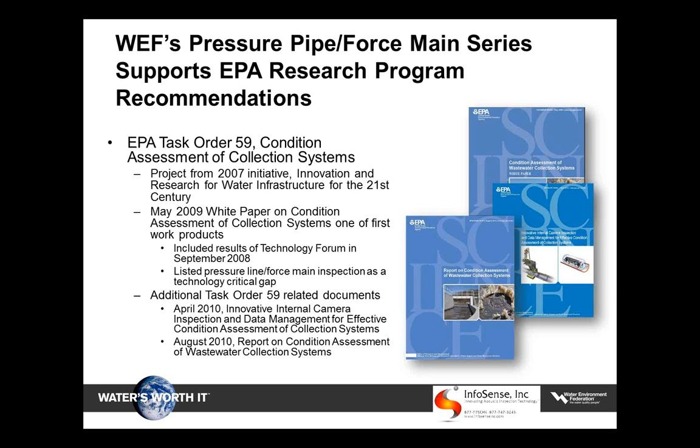Today's speakers: we have Dr. Rob McKim of Louisiana Tech, Mr. Kelly Durr of Brown and Caldwell, and Mr. Mark Lambert of King County Wastewater Treatment Division in Seattle, Washington. The Webcast Committee asked each speaker to emphasize special areas or activities for this presentation series.

It is one of 3 that you've seen advertised through the WEF communications. For today, Dr. McKim was asked to talk more on how you get started, walking through the array of different technologies and screening them for particular local criteria. Mr. Durr was asked to discuss approaches for analyzing the data results and how to handle the data. Mr. Lambert was asked to talk about how to integrate all these processes into site-specific applications and case studies. We also asked each presenter to add a case study to their presentation. So let's go to the first speaker, Dr.

Rob McKim. Dr. McKim is the director of the Trenchless Technology Center and program chair for the Construction Engineering Technology Program, and he's a global technologist for CH2M Hill. Dr. McKim has over 35 years of civil engineering experience in conventional and trenchless technology projects, evenly divided as a researcher and a practitioner. He is a registered professional engineer specializing in the research and practice of trenchless assessment, predictive modeling, asset management, rehabilitation, and installation of pipeline and tunnel infrastructure systems.

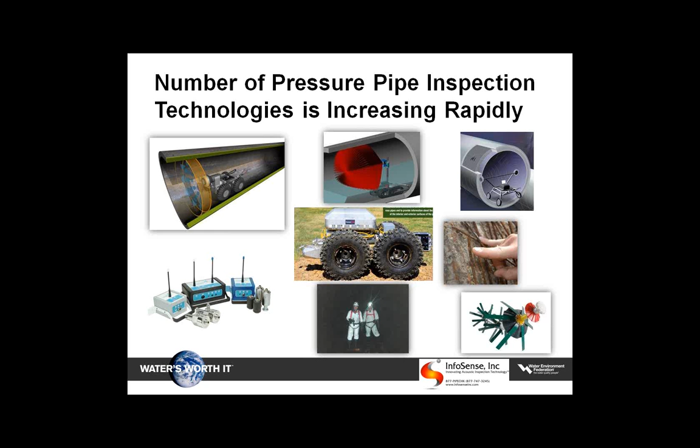And of course, there's what I consider eyeball mark 1, which we can't ignore - it's actually putting boots in the pipe and having a look at it. So we're finding that there's a lot of new technologies coming out that are not necessarily well understood.

So there was an effort around 2010, 2011 from an Industry Advisory Board to start to categorize and work with industry to bring the technologies forward so people understand it. I'm not saying we're the only organization - a lot of very good organizations, including WRF and EPA, have worked on this. We just tried to do it slightly differently.

So we did a joint effort with our Industry Advisory Board people. We found there was an emphasis on pressure side, and both the IAB and ourselves are seeing more need for pressure side. We're always hearing from the wish list we get from our Industrial Advisory Board - what do you want to do? And most of them are saying we want to know more about pressure pipes. So we did an inventory of the technologies we could find, and in 2011 we found 39 technologies under 17 technical categories. We'll talk about the categories later.

So in order to control this vast amount of data, we put together a matrix, which I will show. This is only part of the matrix. To walk you through it, on the left-hand side we have listed the technologies that we found, and along the x-axis we start to define what the technologies can do - are they pressure pipes, what type of materials will it work with, what's the information they're gathering, what is the data they're gathering. This was a way we attempted to organize the data, because it was very difficult to get your head around what all the different technologies could do.

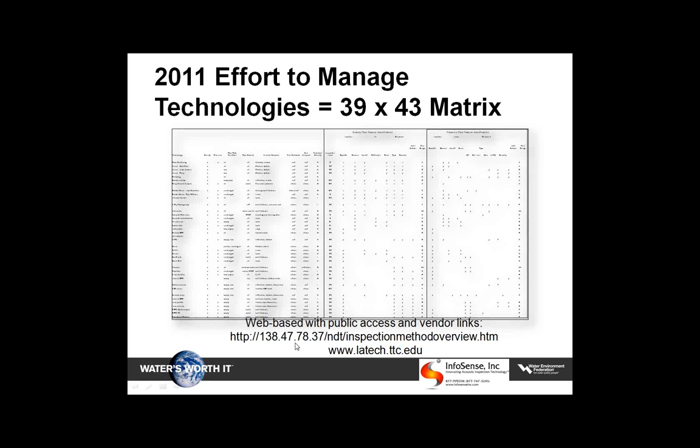This matrix is available on the website, either through our Trenchless Technology website, or you can go right to the HTTP site.

Hey Rob? Yes? That pop-up that keeps coming up, if you just click the first option, that'll stop bothering you. Oh, thank you very much. I was wondering if everybody was seeing that - I thought I had those turned off. That's okay, next time it comes up I will do that.

Some of the matrix input variables that we were looking at that we found were necessary for making a reasonable decision about which technologies you should use - and to say, change color scheme.

Which one should I hit, Rebecca? Just click the top one, yep. Right there? Okay, hopefully. Now what's happening here? Okay, so sorry about that. Rebecca, thank you for talking me through that.

Some of the things we need to know about each technology: for example, is it useful for gravity or for pressure pipe systems? What are the pipe flow conditions it can work on? Does the pipe need to be empty? Can it work under full flow conditions, partial flow conditions? What is the pipe material that the technology will work with? Is it metallic? Is it plastic? Is it reinforced concrete? Is it a very complex pipe wall system, such as pre-stressed cylinder pipe?

The variable detected - are we looking for leaks? Are we looking for cracks? Thinning of a wall? Are we looking for corrosion in wires?

The degree of technology maturity - in other words, what's the probability that when you purchase or utilize that technology, it will give you the information as advertised? And that means, do you have the contractors who can actually execute the work, and do you have people who can interpret the data?

Feature location accuracy - for example, some leak detection systems will tell you, well, we know you have a leak from this point to this point, we can't tell you exactly where it is. Other leak detection technologies can tell you exactly where the leak is. Sometimes you need to know exactly where the leak is, and sometimes you just need to know that there's a leak in your system.

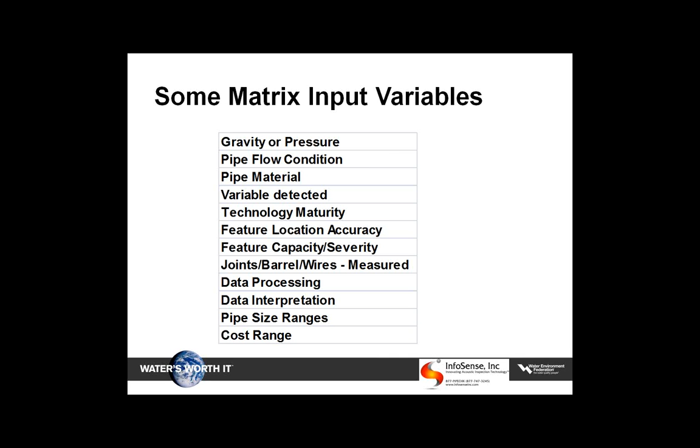So a lot of our technologies now collect the data, and then there's several days of data processing before they're put into a format that you can use. And data interpretation - we're finding that quite often once we get the data in a sensible format, what does it actually mean? Other things like size of pipes - technologies that work in 4-inch pipes may not necessarily work in 72-inch pipes, and also the cost range.

So in 2011, we found that we had these technologies. Here's the inventory of it, and I'm sure we're all fairly familiar with it. Some of these, CCTV, just visual walkovers. Some of them you may not be familiar with, such as X-ray tomography, infrared thermal, and you'll notice that there are some technologies such as InfoSense which are not in here because this field is developing extremely rapidly.

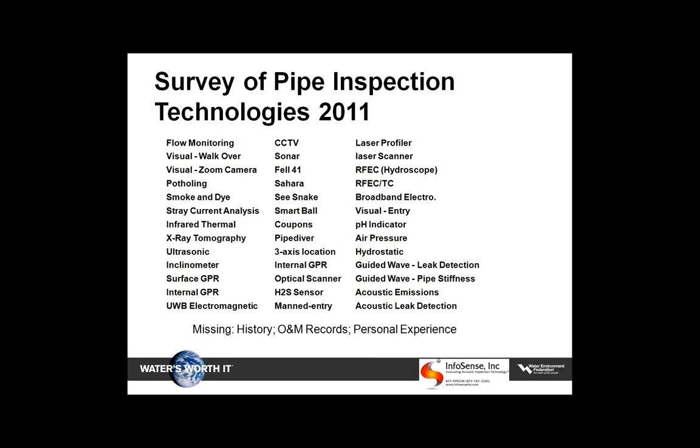And so we're contemplating redoing the inventory for 2014 and updating the new series of technologies that are out there. So we have a lot of technologies, and the question is, which technology should we be using and when? With the help of our Industrial Advisory Board, we'd say, how should we start organizing these?

The first thing was cost, because that's very high on the list of everybody. That's pretty well the first question that they ask: how much is it going to cost? So we grouped them into what we saw were natural lumps of material, groupings of material: under $5 a foot, under $15 a foot, and greater than $15 a foot.

And you can see things like potholing and guided wave, surface GPR - those types of things can be actually relatively inexpensive. Then we move into the CCTV and sonar, which is slightly more expensive. And then we get up into the high-end, fairly expensive ones, which can exceed sometimes upwards of $100 a foot.

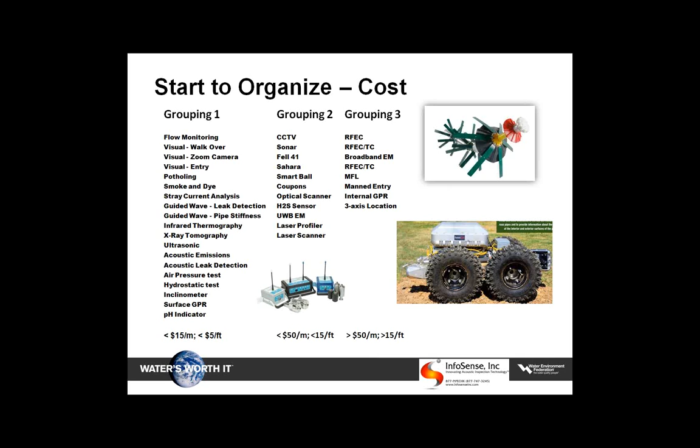What we found is there is a definite correlation between what you pay for and the amount of information and the quality and the accuracy of the information. Pretty much like anything, if you really want to know what's going on, you can spend a lot and get a full understanding of the pipe, or you can spend a little and get a little bit of understanding of what's happening in your pipe. And what you want to do is make sure that you hit the sweet spot and just get the right amount of data for the minimum amount of cost.

These systems don't generally work terribly well whenever you have a complex pipe such as a pre-stressed cylinder pipe, because just looking at what's happening on the inside concrete core doesn't necessarily tell you what's happening at the other structural elements such as the barrel or the concrete outside the core or the pre-stressed cylinder, pre-stressed wires.

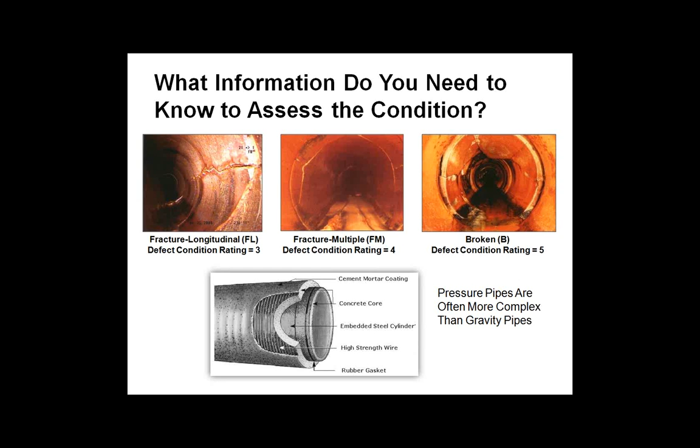Getting back to our matrix, we realize that it's really not a good selection tool. It's a good place to put your information, and it's a really good educational tool. Whenever you're trying to explain why you accepted or utilized a certain type of technology, it's very nice to sit down with the end user and say, I used technology X because this is the material, this is the service conditions you have, this is what you really need to know.

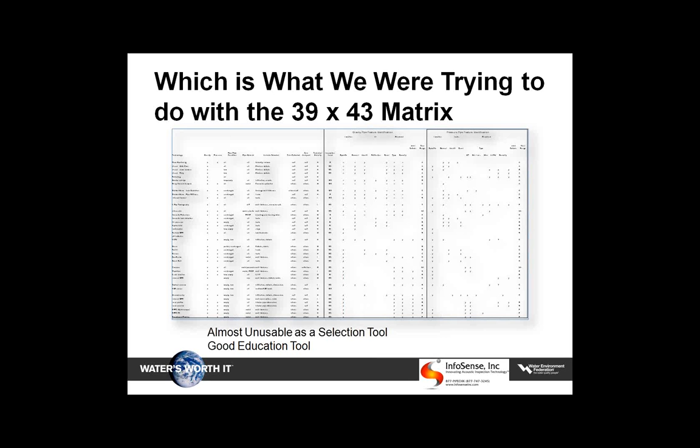So we found that it was more of an educational or explanation tool than where we originally thought we were going, which would be possibly an automated matrix that would pop out an answer as to what technology you should be using. I want to point out we are certainly not the only people.

The Trenchless Technology Center are not the first or the only people doing it. A lot of really good organizations such as WRF and EPA are also working on this. We're just taking a slightly different approach to it.

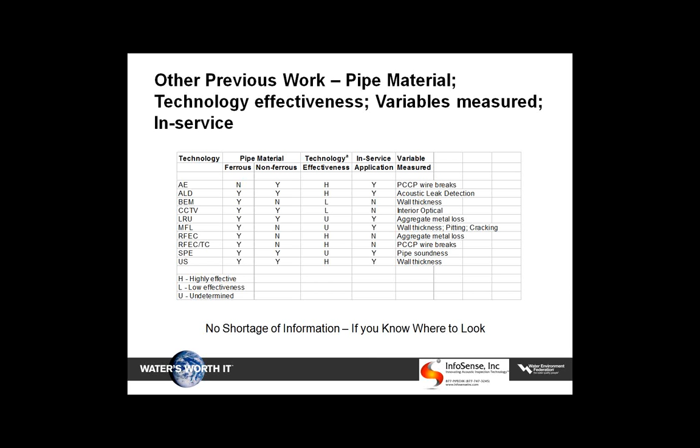Previous work has been done for the first little while. For example, back in the late 2000s, we were just trying to figure out which technology would be used for gravity and pressure. Then we started asking a few other questions: what type of material do the technologies work with? How effective is it? Service applications. So we think that our matrix is sort of the next evolution of these tables that you've seen that were generated by other organizations.

How do we organize these technologies in a usable tool? Well, understand the expectations. What we have found is many utility owners are using CCTV of a gravity system as a benchmark, and that's about $5 a foot.

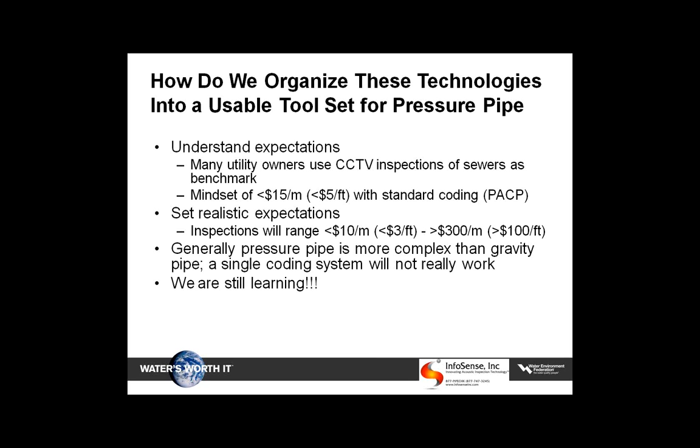That's probably not a realistic expectation on the pressure side. The pressure technologies can go from under $3 a foot to over $100 a foot. Generally, pressure pipe is more complex as well. We're still learning, so you get what you pay for.

I'd like to end up with a very nice little example case study. This is in New England, where there was a utility with 500 meters of 600 millimeter pre-stressed cylinder pipe on a water intake, going from a water intake system underneath the interstate and along an interstate right-of-way, which made it a very critical line into a water treatment plant.

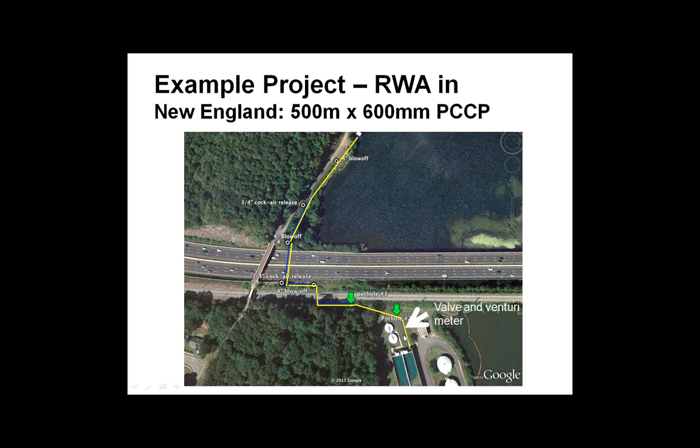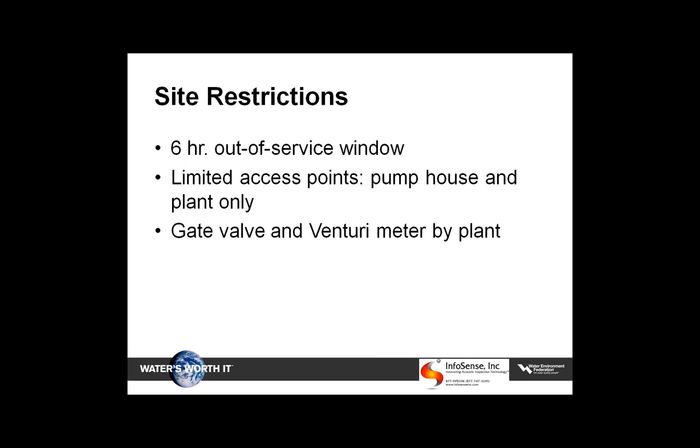We had some fairly hefty site restrictions, and it was all pre-stressed cylinder pipe. We could only have the system out of service for a 6-hour window, and that was all we had, no question. Very limited access points at the pump house and the plant, and we also had gate valves and venturi meters that we had to get through.

We were able to go in what I consider the low-hanging fruit, get a lot of information from maintenance history, operations, obvious issues. Then we started to say, what technologies can we use? In other words, let's look at the low-hanging fruit, get the cheap technologies first, and then work towards some more expensive technologies when we know more about the system.

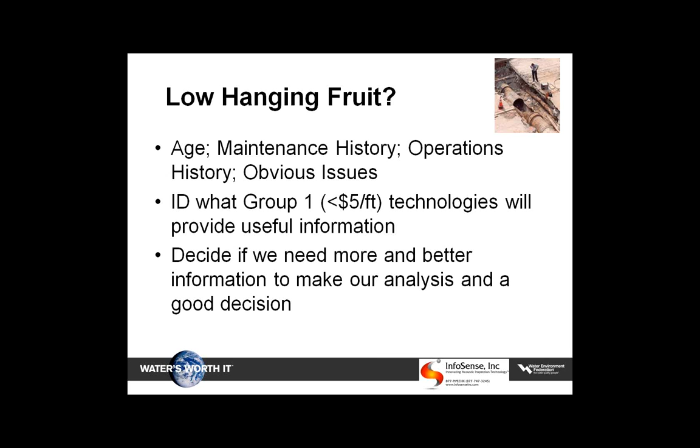So we started out with our grouping based on cost, and we sat down with the utility owners, and we said which of these technologies will work given our specific situation. You can see that visual, potholing, stray current, guided wave pipe stiffness, acoustic leak detection—they work.

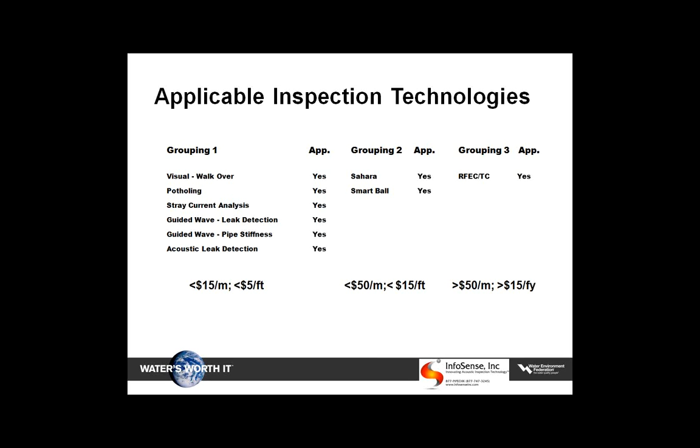Group 2, we had Sahara and Smart Ball, and Group 3, remote field eddy current, transformer coupling. So we had a group of technologies that would actually work and give us decent information. Which one should we use?

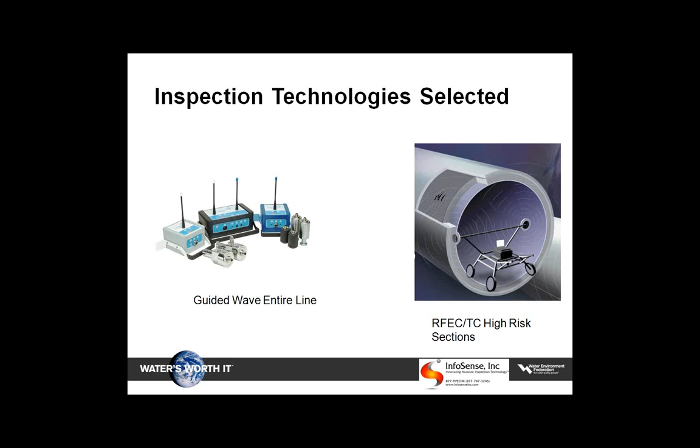We selected the guided wave to do the entire line because that was a very inexpensive technology, sort of at the $5 a foot range. And then we used that to focus in the remote field eddy current for the high-risk sections.

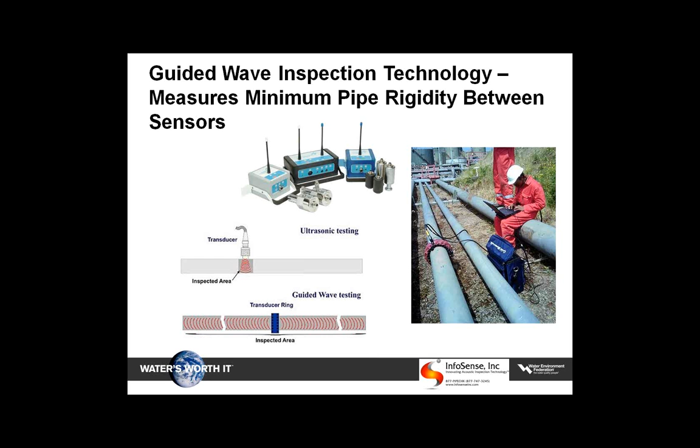The guided wave, basically, you need access to the pipe at 2 or more locations, and it will tell you information about the pipe between those locations. You can't get any more specific as to where the problem is, but it will tell you the weakest part of the pipe between those 2 sensors.

The remote field eddy current measures the actual wire breaks, and it's a little bit more of an expensive technology, but we want to use it where we should be using it.

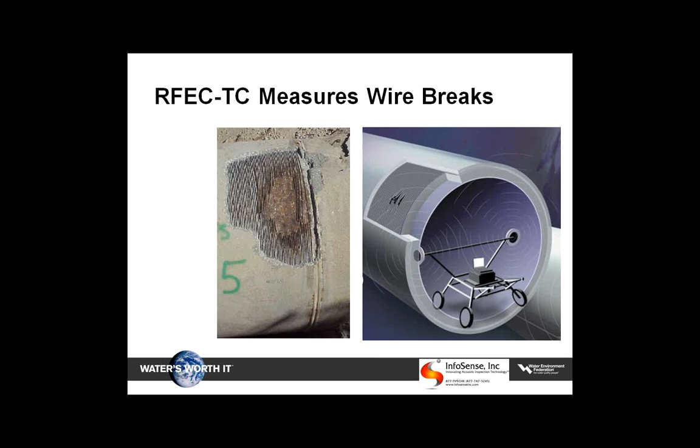What we found is that using the very inexpensive technology as a screening tool, we used the guided wave for the entire section of pipe from the intake all the way to the treatment plant, and we found that there were no major problems or no real problems in the first 3 sections.

But once we got inside the limits of the treatment plant, that's where we had a lot of problems. So we were able to identify from guided wave that we really should be focusing on about the 150-foot section just outside the plant. And so that's when we brought in the remote field eddy current.

The pipe diver was a free swimming system, and we used the approximately $15 a foot plus technology only on that small section.

Conclusion: one size fits all inspection technology probably will not work, give you the information that you want. For pressure side, you really need to understand the limitations and what each technology gives you. The matrix will help you with that.

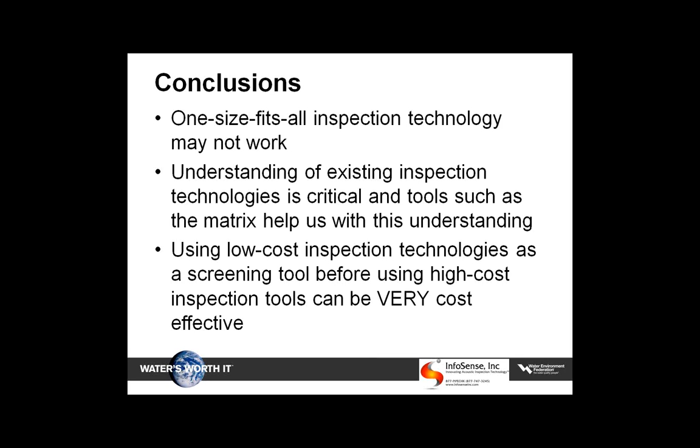It certainly doesn't solve all your issues, but it's a good place to get information. Using low-cost inspection technologies as a screening tool can be very cost-effective whenever you combine it with some of the other technologies. So that's my presentation, and I will hand it over to the next speaker.

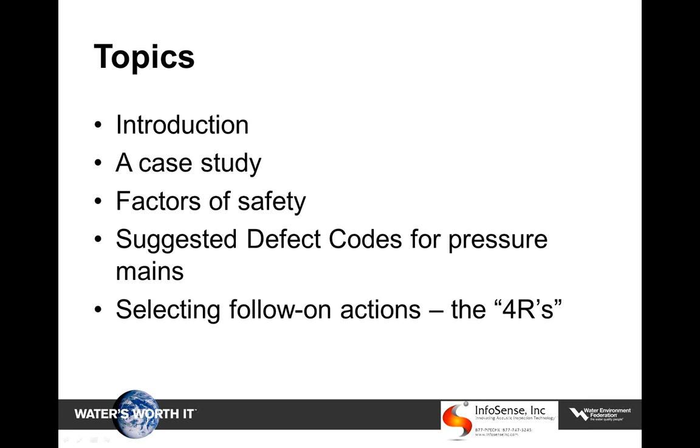As you may have gathered, we're taking this in proper sequence. Dr. McKim talked about the various technologies out there. I'm going to talk about what we do with the data that we get from these pressure main inspections. To do that, I'm going to use a case study that looks at one specific tool and how we use that tool to develop our approach to selecting follow-on actions, the four R's, as I'm calling them. I'll get into that in a minute.

You can do inspections of pressure mains and all our buried infrastructure for a number of reasons. One, we got into it because some of our clients had consent decrees that required it. In this case, this coastal community in South Carolina had a lot of concerns about the condition of their wastewater force mains. It had not been inspected, and they had some failures, as you can see here, and they wanted us to do a complete inspection of their inventory.

As Rob said, as Dr. McKim said, you can really get what you pay for. In this case, they really wanted a very detailed inspection of their force mains to assess the risks that are in there. We did a criticality analysis, risk-based, and we identified this one force main as being very high risk, had previous failures, and went through very critical residential and commercial areas where they did not want to have spilling.

It went from a pump station on the sound side of this barrier island, went inland up to a high point, and then ducked down and discharged at a wastewater treatment plant on the ocean side.

The failures, as you see here, occurred in the crown of the pipe in the down gradient portion of the section where the hydraulic grade line dipped below the crown, and you get a lot of internal corrosion at that point.

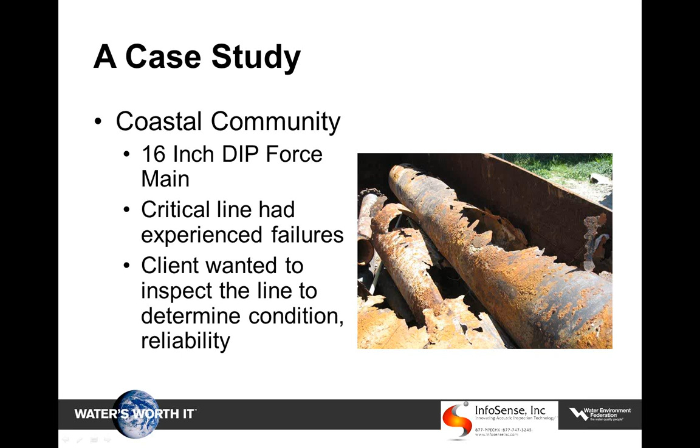Because they wanted very detailed data, we decided to use the remote field eddy current tool. It's called the See Snake, provided by PICA Corporation, which is a subsidiary of Russell NDE. This picture shows the tool just as it's coming out of the 16-inch diameter ductile iron pipe on the first run. This tool can either be free swimming or winched. Because we already had holes in the pipe from failures, it was easier to winch it through.

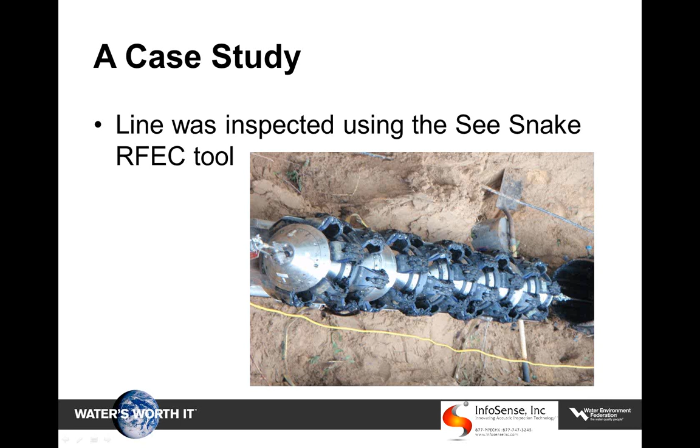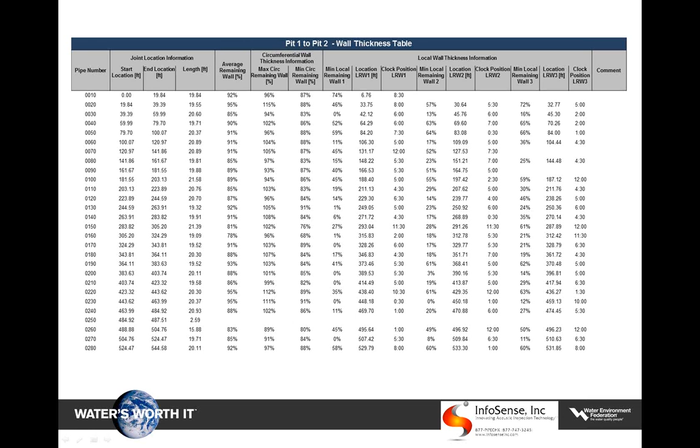This is a large table, actually one small part of the data that we got from the See Snake for this line. I wanted to show this table for a couple of reasons. One, each row is a distinct, discrete stick of pipe. In other words, the first four columns indicate the number of the pipe and where it's located, actually identifying each joint of pipe. The next three give you average wall thickness as a percent of a calibrated nominal wall.

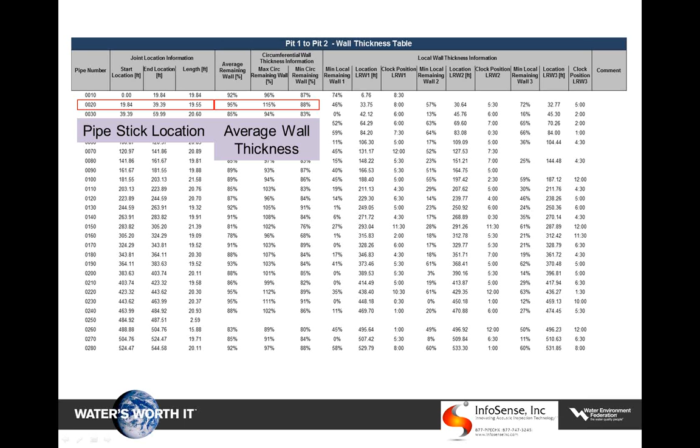And what's really valuable to us, these nine columns give you the data on the top three defects in each pipe stick: the location along the axis, the clock location, and the percent remaining wall thickness. Very good data.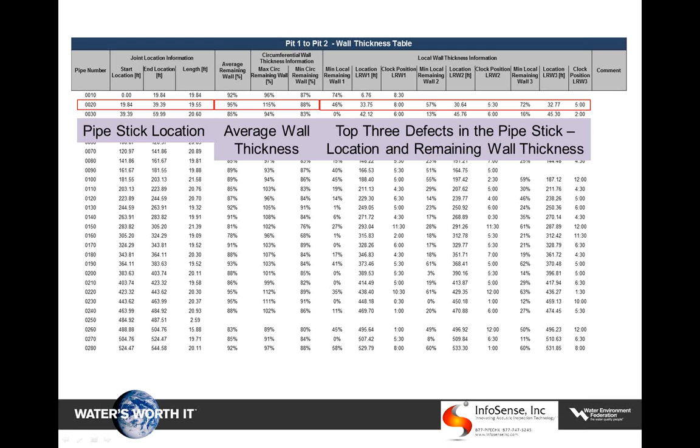What the client was excited about was that this showed that the first 650 feet of the force main had significant wall loss. A lot of sticks with multiple deep pits, and eight actually had holes in them, probably filled with graphitic plugs, so they weren't leaking, but they still had the hole-throughs already. What's interesting is that most of these defects were in the invert, whereas the pipe earlier had failed in the crown.

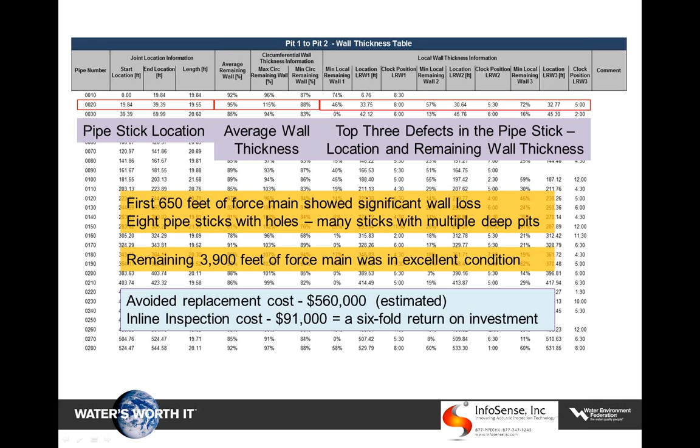Of more importance to the client, the remaining 3,900 feet of the force main, as it got away from the marine area, was in excellent condition. If this data could be believed, they felt confident they could avoid replacing that 3,900 feet of pipe, saving a little over $500,000. And if so, the cost of the inspection would have a 6-fold return on investment. They were very excited, but they wanted to verify it.

So we went to stick number 3, which had a hole in the invert, and a pit with 13% wall remaining about 3 feet away from that hole. We dug it up, pulled it out, and here's what we found: exactly where the tool said it was, there was a hole in the invert, and 3 feet away was a deep pit.

With this level of confidence in the data, the client went ahead and replaced the first 650 feet of damaged pipe with a PVC C900, and is keeping the other 3,900 feet in service. Not only that, but right now we're conducting a pigging operation on the remainder of his ductile iron force main inventory. We're pigging one of the longer lines today, and I hope to put the SeaSnake in it probably tomorrow.

The question was, obviously, if you have a hole in it, that's easy to decide what to do with. It was easy to make the decision to replace that very badly damaged 650 feet. The question now becomes, what if you're in between? If you have moderate wall loss, what do you do? How do you decide?

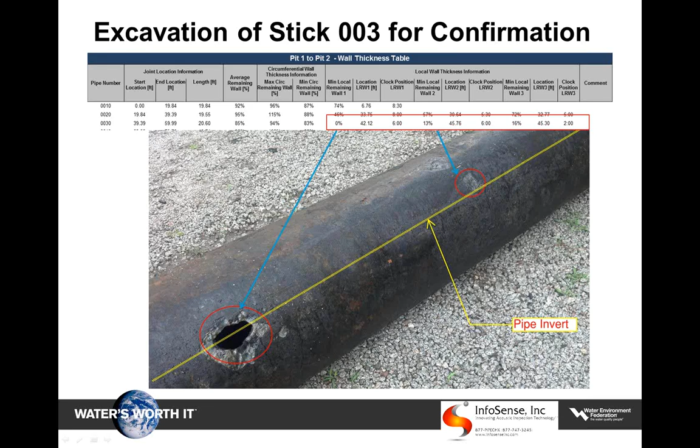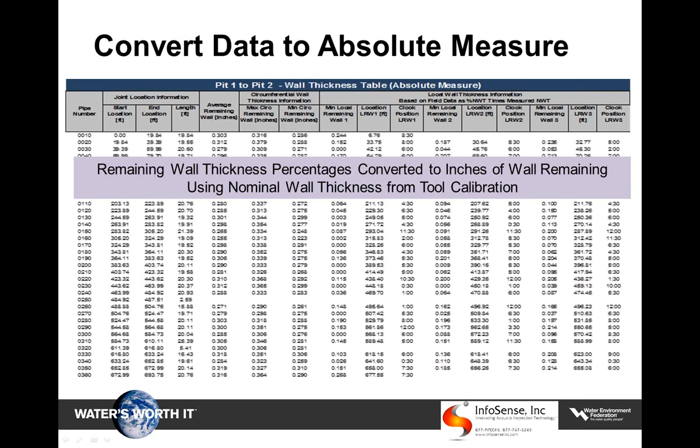The first step was converting all the percent wall thicknesses into actual inches using the nominal wall thickness from the calibration test. This allowed us to convert percent wall remaining into inches of wall remaining. Then it was fairly easy to back calculate the actual factors of safety each stick of pipe was affording, because we knew the operating pressures, the surge allowance, the wall, the pipe depth, surface conditions, live and dead loads. We were able to calculate the minimum factors of safety against both internal pressure and external load.

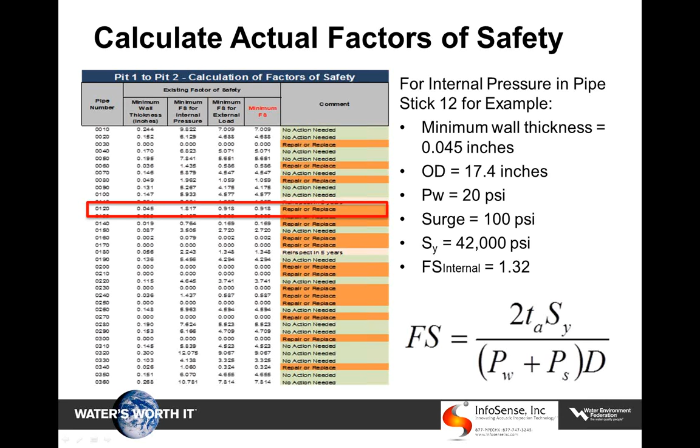With this client, we came up with this category. If the factor of safety we calculated under actual conditions was greater than 2, which is a standard design factor of safety, the pipe segment was in good condition, and we only needed to re-inspect, perhaps on a routine inspection cycle. If it was less than 2 but greater than 1.2, we determined the pipe was deteriorating but still serviceable, depending on where in that range it fell.

We can either re-inspect at an accelerated rate, say in 5 years, or if it's close to 1.2, or has a lot of holes or pits in it, we may decide to repair or rehabilitate it now. Again, if the factor of safety was less than 1.2, it's heavily deteriorated, and we needed to do something, depending on how many defects there were—either repair, rehab, or replace. We used 1.2 as a threshold to give our client some breathing space, so if he wanted to get the pipe segment onto his CIP, he had time to do that.

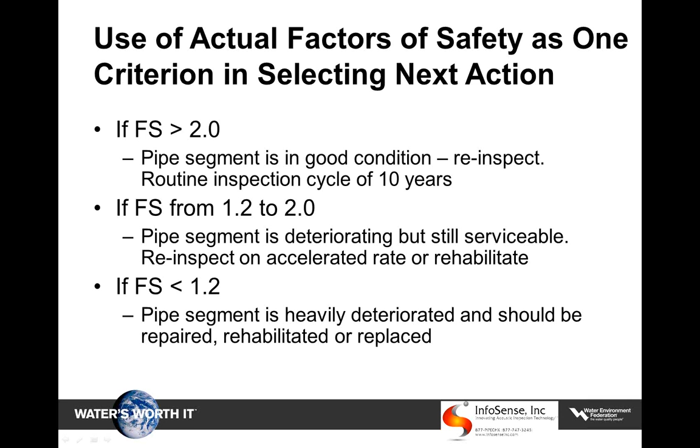So this is a very initial step in deciding what we need to do. However, we still don't know what kind of repair to use, what kind of rehabilitation program, or when we're going to do it. The next step was to develop a selection tool, and for that we are developing preliminary defect codes for pressure mains, starting with actionable defects and progressing to observations and screening—things we can use to make decisions for each of these defects.

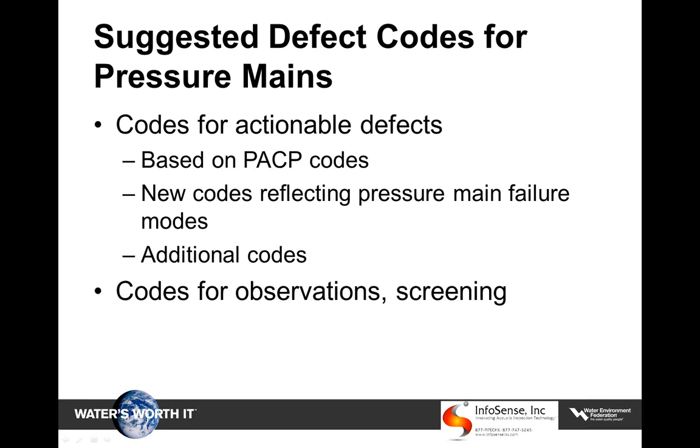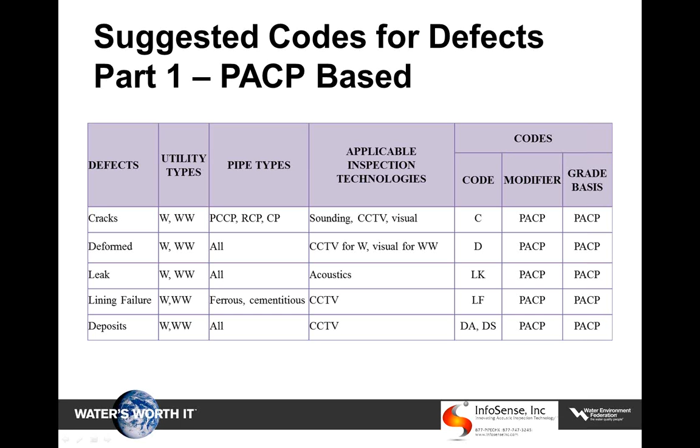Obviously, we started with the PACP codes. We had about 5 that made the transition and were applicable to pressure mains—there are more out there, but these are the 5 basic ones: cracks, deformations, leaks, and lining failures, which are fairly common to both gravity and pressure pipes. For these, we use the same codes, same modifiers as PACP, and the same severity grades from Appendix D in your PACP manual.

To those, we've added defect codes based more on the failure modes of pressure mains. Wall loss is a failure mode in gravity lines, but it's not nearly rigorous enough for us to determine the condition of a pressure main. So we've expanded the wall loss category and made it much more rigorous, based on actual percent of wall loss and wall remaining. We've also added wall pitting, tuberculation—particularly for water mains—and for pre-stressed concrete cylinder pipe, we're adding wire break zones, wire break rates, and we can even look at cylinder defects.

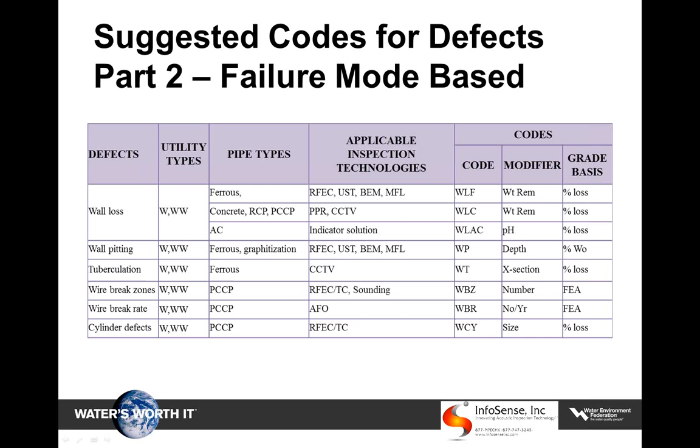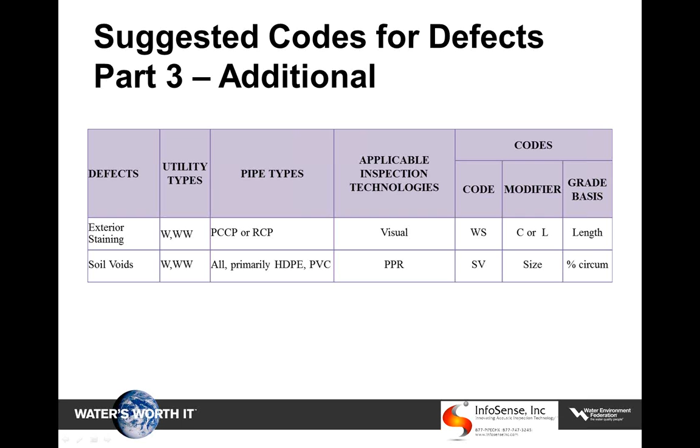Some additional codes for exterior staining, particularly for PCCP or RCP. If you've got rust stains on the exterior of the pipe, that gives you a good idea you need to look there and see what's going on. For plastic pipe, really the only observation we can make is whether you have soil voids externally to the pipe.

We also included screening codes. These are not condition assessment codes or defects. They're actually indications of where you may have a problem. Acoustic systems, like Dr. McKim was talking about, can tell you where you have leaks or gas pockets, and that would be an indicator of possible internal corrosion. It doesn't prove there is corrosion, but it says that's a good place to look.

For external corrosion, we have a number of external tests: corrosive soils, stray currents, active cells. There are more tests out there, but these are the ones we're putting in, and I invented a couple of codes and modifiers for those.

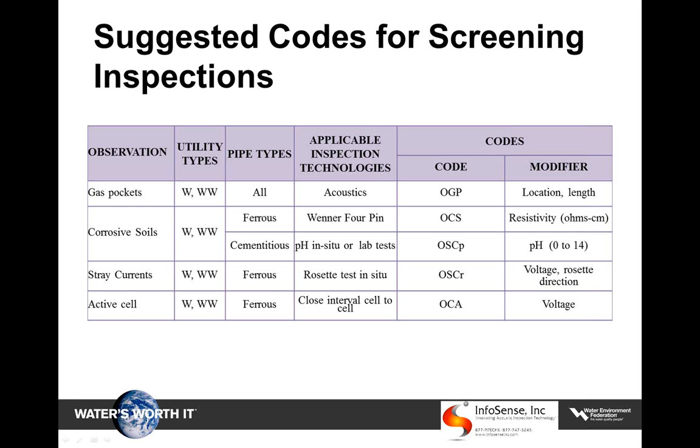The system elements - one of the key challenges we've had in inspecting pressure mains is the lack of complete data sets in utilities' GIS systems. It's surprising how many clients don't even know where their force mains go. So we found it very important to go in and improve their database on valves and valve types, fittings, locations, fitting types, house connections.

This is not only important for your database, it's also important for planning your inspection program, since many tools, such as the inline tools, cannot go through a plug valve, for instance. Or vendors don't like to put them through plug valves - the little lip catches.

Other elements that are good planning elements to know when you're putting together an inspection program are diameters of the pipe, material changes, and whether there's been a point repair.

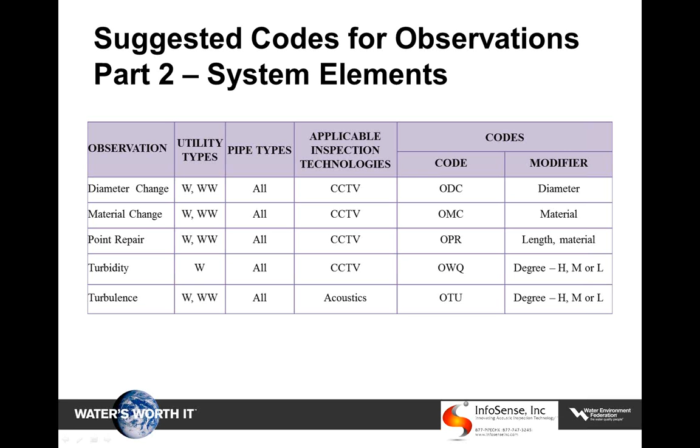For inspecting water mains, we have found that sediment in the bottom of the pipe can be a bit of a problem, particularly for some of the inspection tools, which may rile up that sediment and cause turbidity issues. So you need to know about that, or address that, before you go in with the inspection.

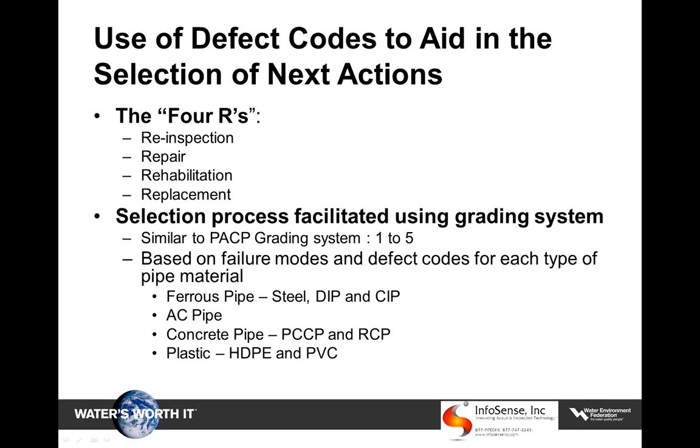Now, the whole purpose of this, while we're developing the factors of safety and the defect codes, is to help us select the next actions, which I've called the 4 R's: reinspection, repair, rehab, and replacement. We started with the PACP approach, which has a grading system of 1 to 5, and we've added more defect codes for the failure modes. And it's different for each type of pipe.

We've developed a very simple tool. This is really at the very beginning of our development of this decision tool. It was actually developed as a training instrument for our in-house engineers, and we've had clients ask us for this as well.

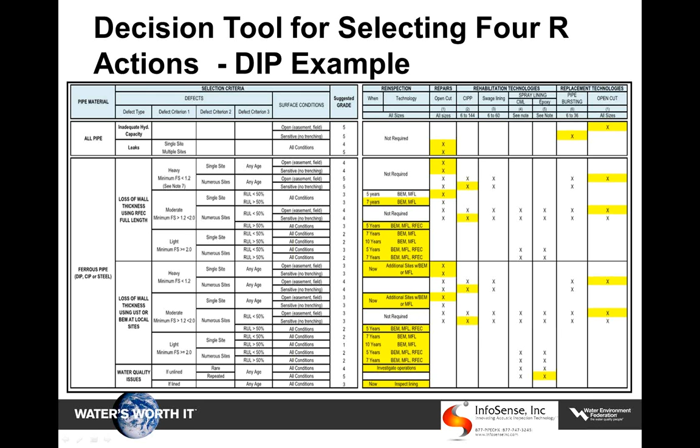This is simply the first page of about 10 pages of code. It's meant to be used from left to right, and I'll break this down so you can see it a little better. I'll show the left half first - these are the defect codes that you found in the pipe. This is for ferrous pipe.

The first defect type was loss of wall thickness. I'll just run through it from left to right: it's a moderate loss of wall at numerous sites in this pipeline. It's a fairly older pipe, and it's in a sensitive area, so you can't trench. These are all just as an example, and for this combination of criteria, I'm giving this a grade of 4.

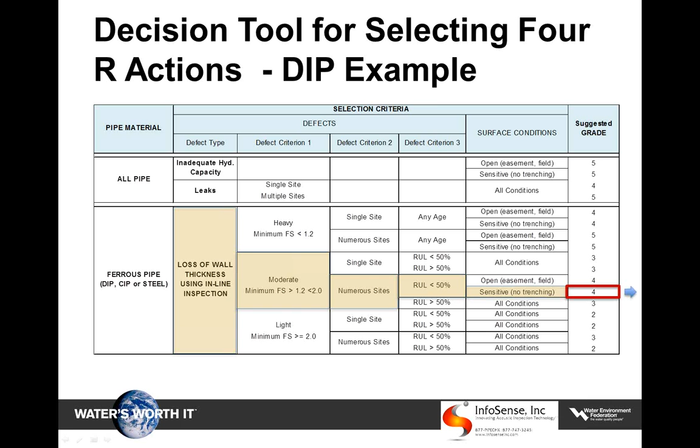Using that, we then move to the right-hand side of the table, which gives us the potential options for addressing whatever defect we found on that pipe segment. The X's mark the approaches that are acceptable to the client and feasible for this kind of defect and material. There are a lot of other technologies out there not in this table - these are just the ones this client likes to use and prefers. These are customized for each client. The yellow is my indication, in my opinion, of what would be the optimal approach for this particular combination of modifiers.

I'm saying this is a cured-in-place pipeline rehabilitation.

Very simplistic, very early days in this, and I would love to get input from people on the additional codes and additional ways of using this simple approach.

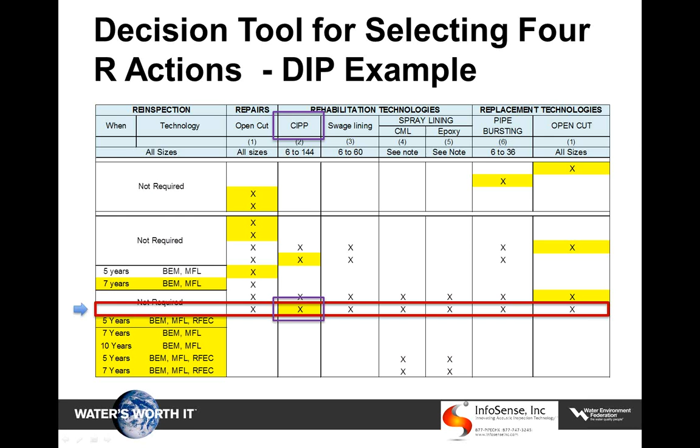Just to summarize, we have described an approach for using the factors of safety based on the data from our inspections to prioritize the pressure mains for follow-on work. And to do that, we've developed a set of defect codes, very early days, and a method for using defect codes to develop a quantifiable condition assessment. Again, as I mentioned, this was first developed as a teaching tool for our engineers getting into this approach, but a lot of our clients have asked us to help them develop a similar tool for their own engineers.

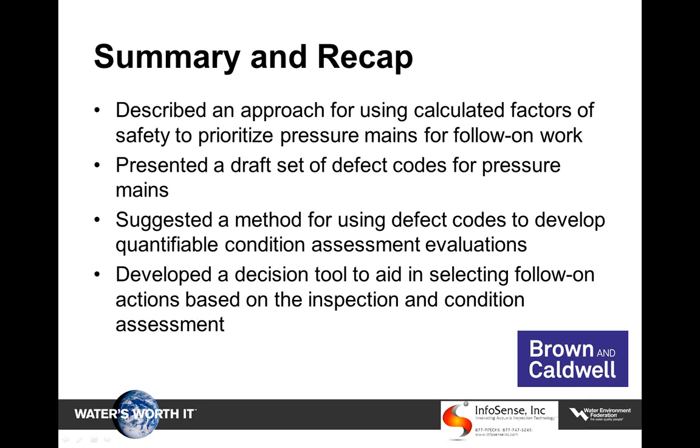Mr. Lambert has served as a senior wastewater engineer in Seattle for the King County Wastewater Treatment Division. He is a project manager for the force main pressure sewer and siphon assessment and inspection project that was completed in 2011, and part of that project, planning project for the review and update of the system-wide pressure pipeline inventory and review of the system's failures and inspection status and options for further inspection.

Mr. Lambert was the lead engineer on acoustic inspection for the North Beach force main, and as part of his team, he was tasked with the overall assessment of the North Beach pump station and force main system. Mr. Lambert has also had 15 years of conveyance planning and modeling with the agency, and he provided comprehensive and project-level engineering support for capital facility planning.

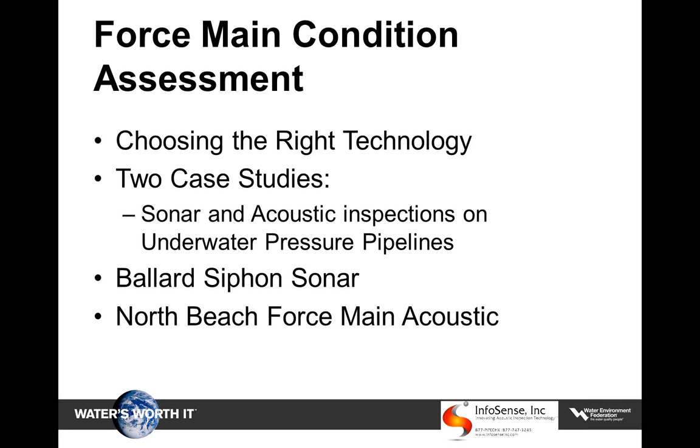Start off with the Ballard siphon. The Ballard siphon is a 1,300-foot long wood stave dual inverted siphon going under the Ship Canal in the Ballard neighborhood in North Seattle. It was constructed in 1935. It has twin 36-inch diameter barrels, and they're actually banded together during the construction. You can see in the portion of the plans here, they're tied together.

That gave us a little bit of concern that if we did something or influenced one pipe, it would probably influence the other one also.

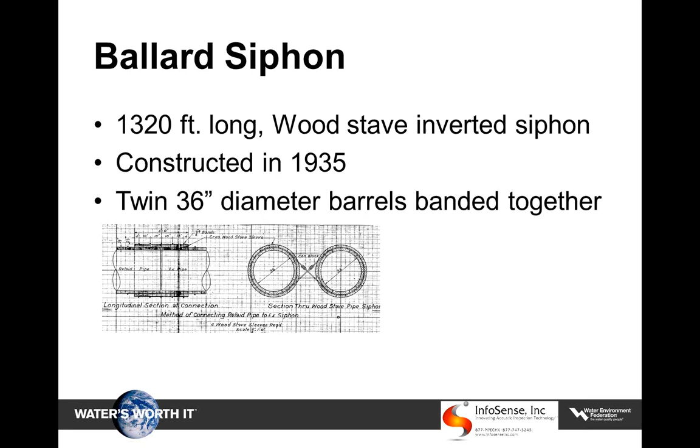Just as far as the location goes, it's in an industrial area. It's very tight conditions as far as being able to provide work areas to access it. We really didn't have a whole lot of options as far as being able to access other than the forebay and the afterbay.

The Ballard siphon was one of a group of initial sonar siphon inspections for WTD. Back in the mid-2000s, we were investigating numerous technologies to inspect all of our siphons that we really hadn't looked at previously. And the Ballard siphon was one of a half a dozen or so that we started with in 2005.

A number of the siphons now are on a regular sonar inspection with some newer technology sonar, that later generation that is able to tell us some information that we weren't able to get on the first one here.

Once again, it was initially inspected in 2005, in late 2005, and again in early 2007. Just prior to the second inspection in 2007, we pulled the pig through both of the barrels, and noticed on the 2007 inspection that some of the results differed. Some of the cross sections that we were seeing in the sonar profiles were different.

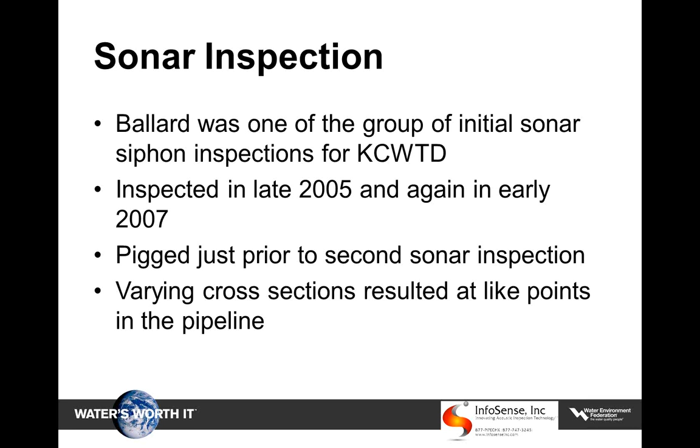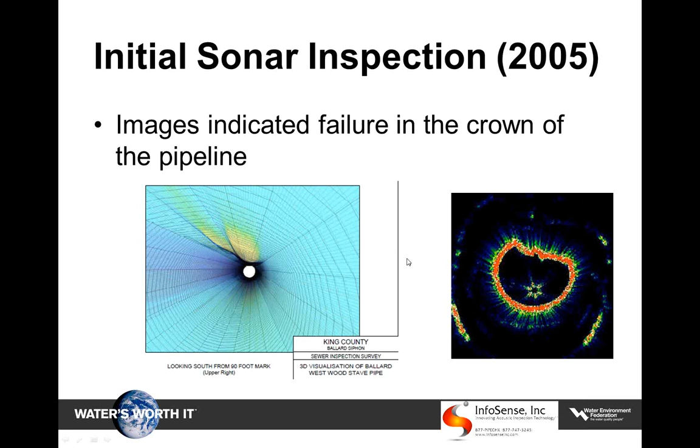Just as an example of some of the graphics that we got initially in the 2005 inspection, you can see it appears there's a collapsing of the crown of the pipe at about the 90-foot mark, and the image on the right is some of the raw data that you see during the inspection. The image on the left is some post-process data based on a conglomeration of some of the data that was collected.

Once again, the second inspection did show some changes in the cross sections. In this case, at 95 feet, the image on the left actually showed more obstruction in 2007 than we had in 2005. Once again, this was after the pigging. And at 900 feet, the image on the right shows that we actually had less obstruction in 2007 than we did in 2005.

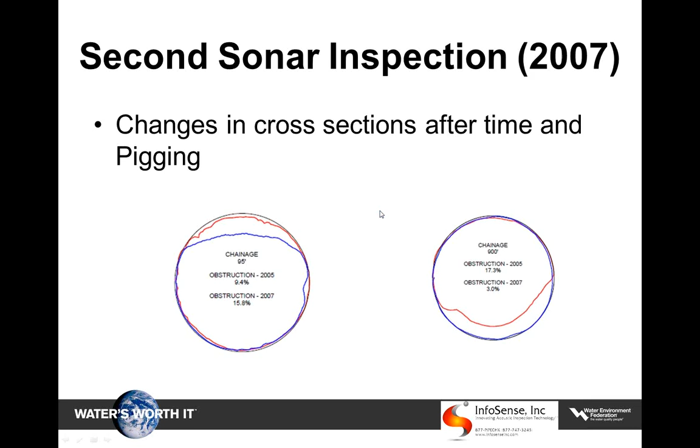Now, this caused a number of us to wonder what exactly was going on, and project team members kind of huddled together, and a decision was made to do a partial video inspection.

There was some concern at that point about pumping down. The sewage was much too murky. We couldn't see, the inspection teams couldn't see anything in the pipe. So there was a decision made to do a partial pump down.

Some calculations were made using basic fluid statics of how far we could go before we were really concerned about either floating the pipes that were buried in a bunch of sediment or causing the pipes to collapse from external pressure.

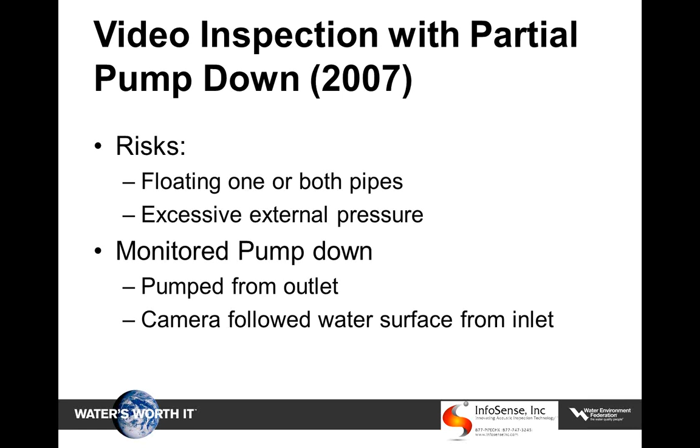So what was decided is there would be a monitored pump down where we would run a submersible down from the outlet and begin pumping in the isolated siphon. We were able to divert to one of the other siphons. And then the camera simply followed the water surface down from the inlet.

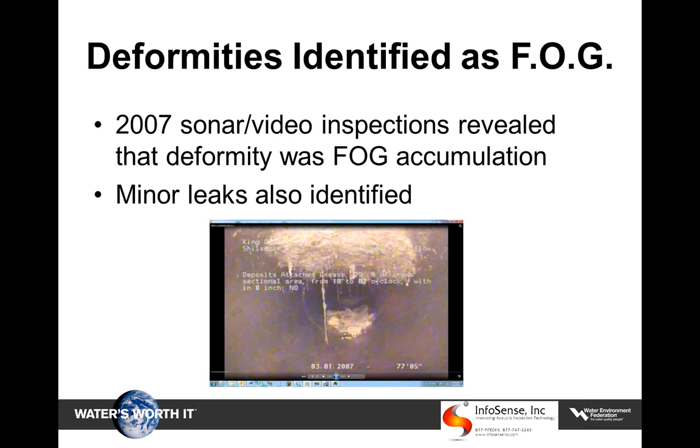And lo and behold, we got about 70 feet down and revealed that the deformity was fat, oil, and grease accumulation in the crown of the pipe, which was something we had found in a number of the other inspections subsequent to that - the crown of the pipe tends to collect fats, oils, and greases. Along with this, we also found a number of minor leaks.

As far as the overall results for the project, this was part of an assessment being done on both - we have another major siphon just to the east of the Ballard siphon, the Fremont siphon. Those two siphons are the only connection conveyance points from North Seattle to South Seattle across the ship canal.

So this was part of an overall assessment of what we were going to do in the future. Both of the siphons are very old. The Fremont siphon is actually older than this one.

While the inspections were going on, there was a great amount of work being done to look and see what it would take if one of them failed, how long it would take us to actually construct a temporary system. And based on the results of that analysis, along with the information gained from the inspection, an overall risk analysis resulted in replacement of the current siphon.

That project is just wrapping up as we speak now. They're pulling HDPE through the old wood stave barrels. We tunneled and installed a brand new high flow siphon.

So that replacement and rehabilitation is giving us a lot greater capacity through the Ballard siphon, more redundancy, and some more flexibility on how we manage our flows from the north end of the system down to the West Point treatment plant.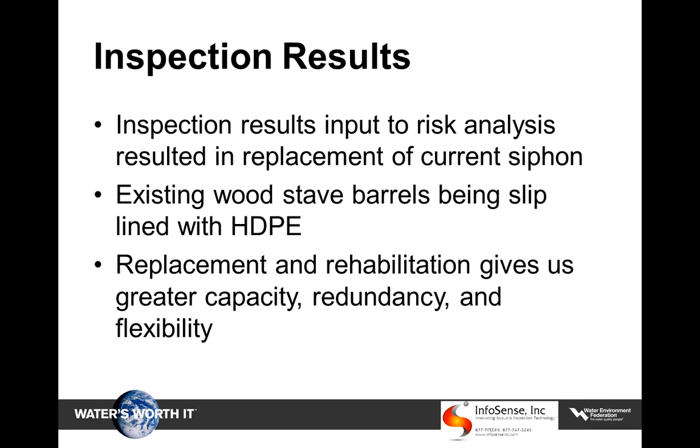This project, the North Beach force main acoustic inspection, was one that I had a lot more involvement in than I did at the Ballard siphon.

North Beach force main is a 14-inch diameter cast iron pipe laid in the tide zone in the beach in 1961. About 5,000 feet of it runs in the beach parallel to some railroad tracks, and then it turns to the east and runs about 2,000 feet in a park up to the Carkeek stormwater treatment plant, stormwater pump station and treatment plant.

The assessment was part of an overall force main pump station assessment. There were some capacity issues. There was the thought that we might have some blockage in the system, and we were also interested in determining what we thought the remaining useful life of the facility is.

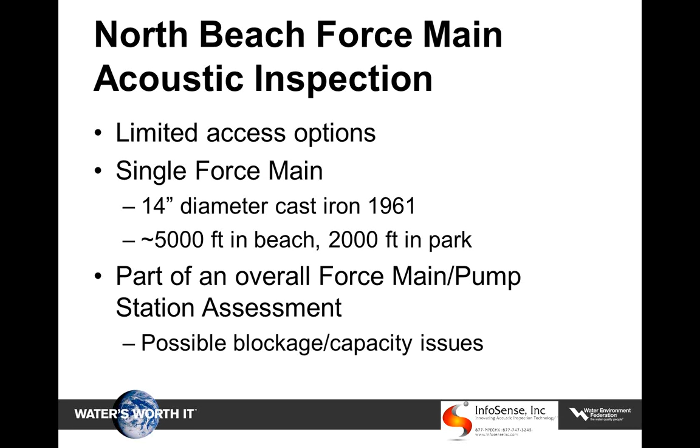Unfortunately, it's a single force main, so our access and isolation, or ability to isolate for inspection, was very limited. So that shaped a lot upon what we were able to actually use for inspections.

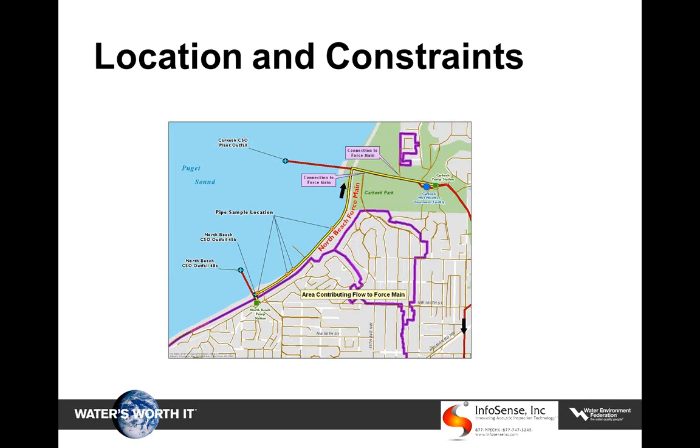There's a quick diagram just showing some of the constraints where we are running along the North Beach area and then turning east and heading up to the Carkeek pump station stormwater treatment plant. As I said, we had limited access.

A number of the technologies would have required pigging. We talked to some of the pigging contractors and some of our folks that have done a fair amount of pigging. There are some 90-degree bends identified in the record drawings. We are going to have to do some fairly significant construction at the pump station to be able to actually launch a pig. And so we were really limited by what we could deliver, what sort of device we would be able to deliver for the inspection.

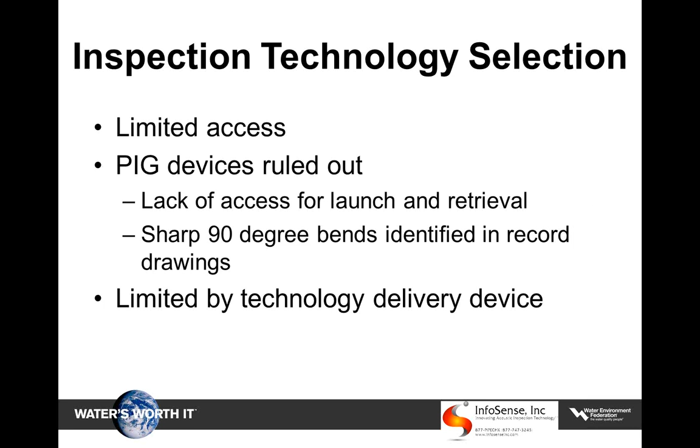So we went through a screening process similar to the processes described by the previous presenters. Out of that, SmartBall was selected. It's a free-swimming technology, basically a foam ball with an acoustic device in it, developed by Pure Technologies.

We sent the basic information to the vendor. They reviewed and confirmed the feasibility. They actually came out and did a walkthrough.

As part of the project, it was identified that we needed steady pump station flow to maintain a constant velocity, well beyond what average flow was going to be at that pump station. So at that point, we had to go and talk to our partners at Seattle Public Utilities, the major water purveyor in the Puget Sound area.

They have a fairly standard process, if you have a construction project, that you go through to get a hydrant. You hook up to a hydrant, they stick a meter on it, and charge you for any water you're using. That all seemed pretty well until I told them we needed about 1,000 GPM for about 2.5 hours. We ended up finding a hydrant that happened to be a fairly high-pressure hydrant also, about 160 PSI.

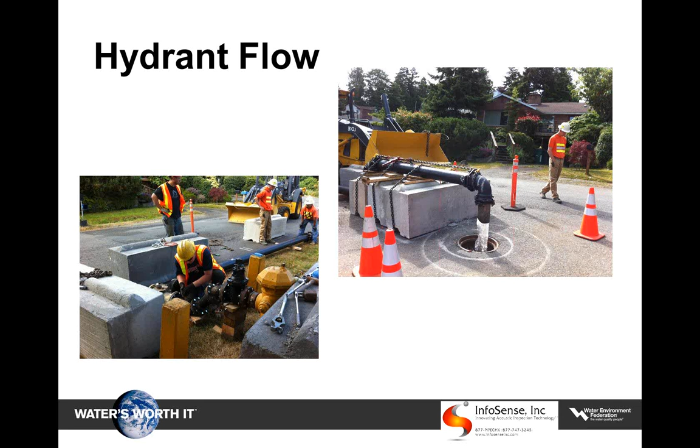Retrieval was fairly easy because we have a trash rack at the pump station, so when it exited the force main discharge structure into the pump station, it was simply retrieved on the trash rack. On the upstream end, we were able to launch the device through a vault that normally has an air relief valve on it.

We were able to simply close the blind flange, hook the launch device onto the blind flange, and they were able to launch the device very easily.

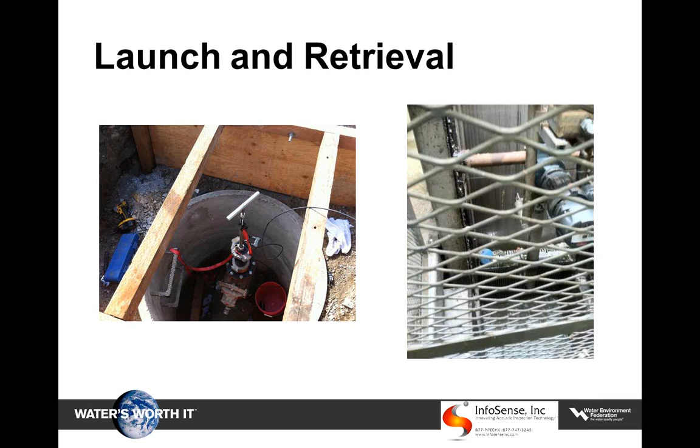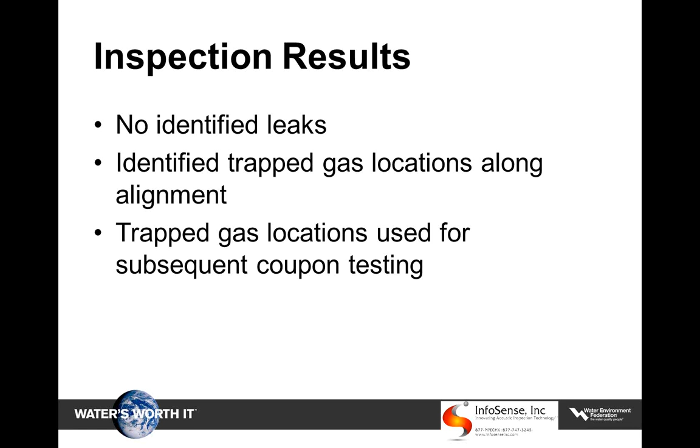As far as the inspection results of the North Beach force main inspection, there were no identified leaks. They did identify trapped gas locations along the alignment, and those locations were used for some subsequent coupon testing. This is a fairly standard type of test, aside from the fact that it's on the beach.

The coupon testing involved quite a bit of permitting from our permitting staff, who did an excellent job, and then delivered heavy equipment via barge onto the beach. We ended up taking 3 coupon samples along the alignment using standard hot tapping techniques.

Those coupons we were able to compare to some previous coupon testing performed in 1989, which gave us a bit of a benchmark, and we were able to determine that the force main does in fact have a 20 to 30 year service life remaining in it based on the coupon testing inspections.

We're also hoping that as some of the technologies and delivery devices advance, we will continue to be able to test this again and get an idea of exactly what we can look forward to, as far as being able to maintain this system and not having to parallel it or come up with an alternative.

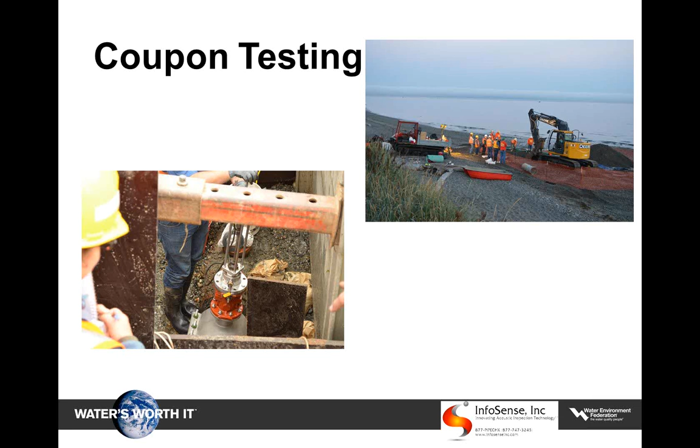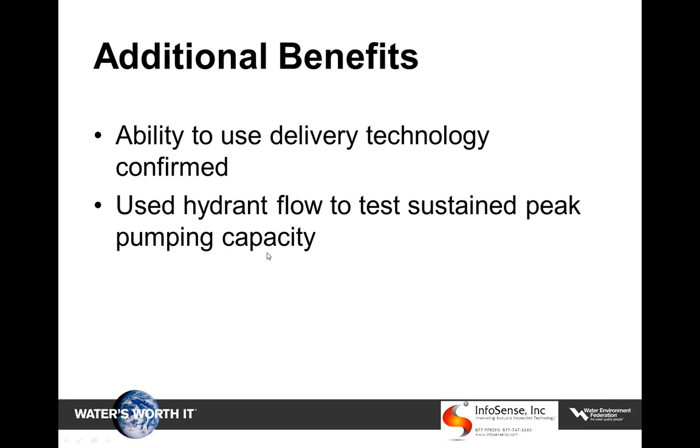So that is pretty much it for the examples that I had.

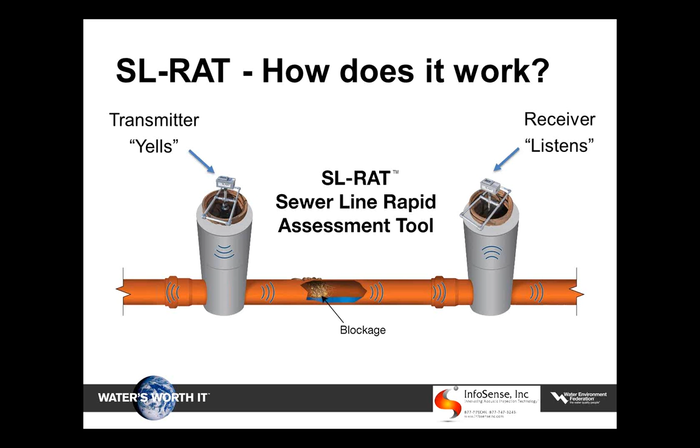It has been the focus of numerous articles, including making the cover of Municipal Sewer and Water magazine in November of 2013. This time I'd like to give you a brief example, a case study of how a municipality has used the SL-RAT in a pre-cleaning application.

The city of Augusta, Georgia encountered a situation where they had a 36,000-foot basin that was prioritized for cleaning due to customer complaints of low flow. To clean the basin would have cost approximately $40,000 with an outside contractor. Without the SL-RAT, that's what they would have done.

But with the SL-RAT, their crew was able to inspect the entire basin acoustically in approximately 3 to 4 days. What they discovered was there was only about 2,200 feet of pipe that actually needed cleaning. So they were able to deploy their own equipment to take care of the problem, and the savings from this one situation essentially paid for their purchase of the SL-RAT. There are many other stories like this one that we would love to share with you.

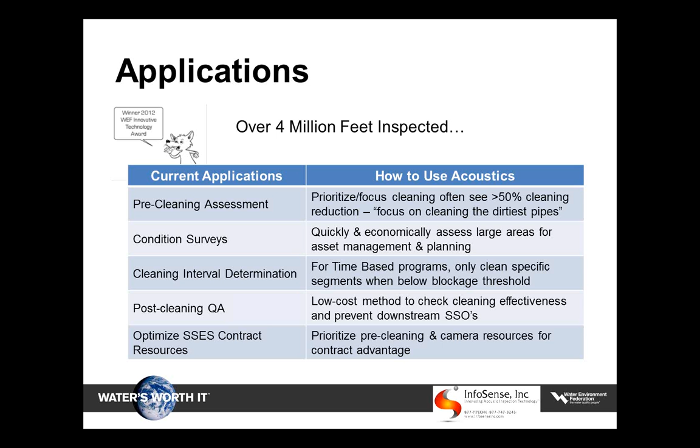on cleaning and camera work. This better focus can improve the effectiveness of your cleaning operations dramatically and consequently help economically reduce the occurrence of SSOs. Again, there's more information available on our website.

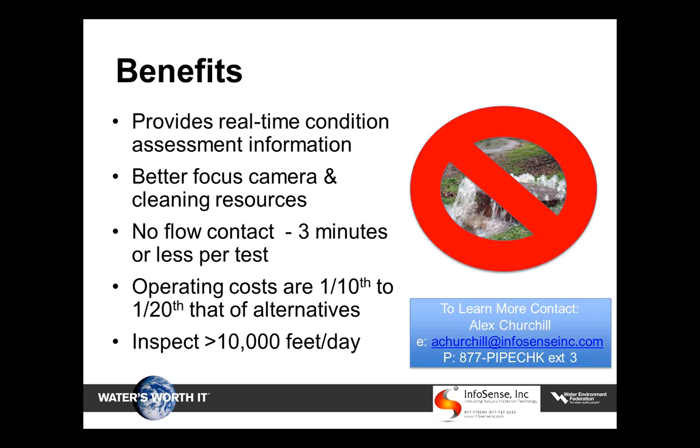Okay, thank you, Mr. Churchill. Well, we've received quite a few questions, and let me encourage you to continue to send them in, but we'll start. There's quite a few for each of the presenters. Let me start with Mr. Durr. Does the force main need to be dewatered for this See Snake application?

In this case, because the force main had already failed at one point, it was already dry. So we opted to do the winched pull through, and it did have to be dewatered. The See Snake can also be free swimming, where it's inserted hot into the sewer, into the force main or water main, and uses the water pressure to push it along. So it could be either way, depending on what the client really wants to do in terms of disruption.

Okay, related to that, how well does technology such as the See Snake identify deterioration at the pipe joints? I don't think so, well, the See Snake is purely electromagnetic, so it's not going to tell you anything about the condition of the joints, if that's the question. I have talked to PICA people about adding an acoustic sensor to see if there's any leaks. They have not done that, but certainly they could if they were asked to.